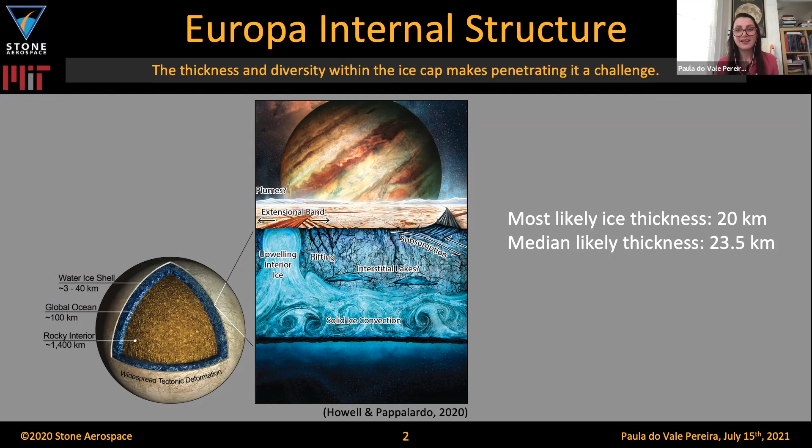Next. There are 4 stages of penetration for the Europan ice, which I'm here calling the starting problem, the cruise phase, the obstacle problem, and the ocean penetration. At the starting problem, there is little contact between the probe and the ice, so it's challenging to transfer much heat. The cruise phase can be divided into the brittle ice transit and the ductile ice transit, and they are characterized by a relatively steady velocity.

We do not know precisely what the composition of the ice in Europa is. We know it's mostly salty water, but there might be blocks of concentrated salt, rocks, cracks, lakes, or even voids on the way of the probe. Passing through such obstacles is very challenging, so we call that interaction the obstacle problem. Lastly, the ocean penetration is the phase in which the probe reaches the ocean.

Next. The stage that is expected to last the longest is the brittle ice transit. So if we develop a model that reliably predicts probe velocity in that stage, we will be able to estimate how much time it will take to reach the ocean.

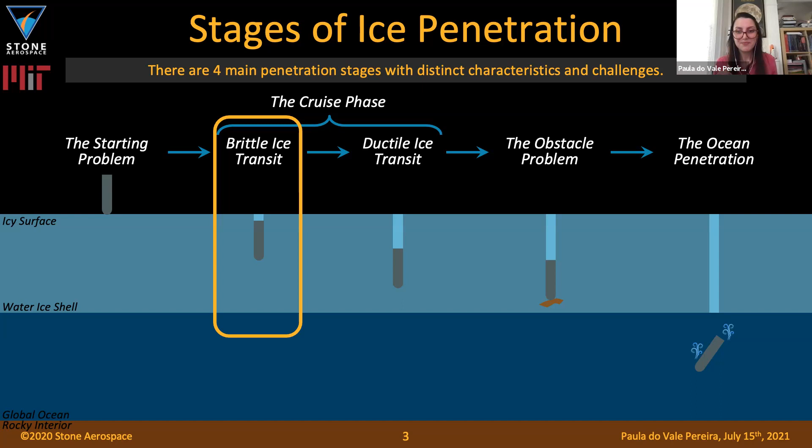Next. There are 4 methods for ice penetration being currently studied: mechanical drilling, hot water drilling, thermal melting, and laser melting. Hot water drilling and laser melting, though, are still in the earlier stages of development, so the most common ones for steady-state ice penetration are currently mechanical drilling and thermal melting.

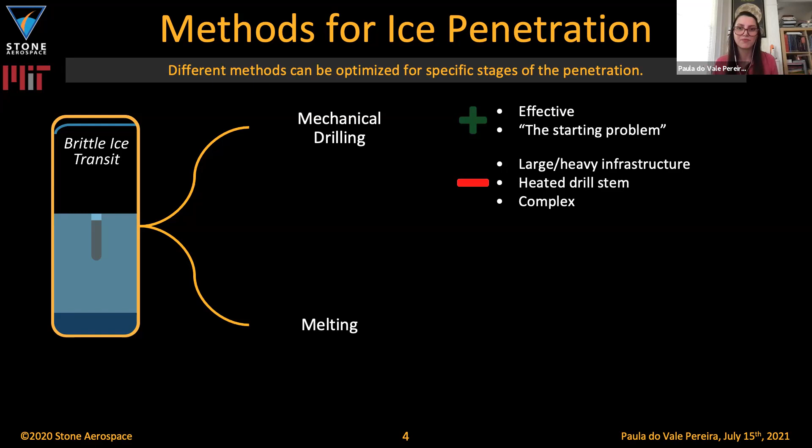While mechanical drilling can be made effective, it is significantly more complex than melting. The large and heavy required infrastructure also needs to be addressed before we can take mechanical drilling to Europa. Melting, on the other hand, is not only the simplest option, but also the one method that can be analytically modeled, making it possible to infer predictions and optimize time to ocean models.

Hence, our focus is on melt probes for the brittle steady state transit. This is important because it will help scientists estimate the amount of time it will take for the probe to reach the ocean and how much power is needed for that speed to be achieved. So talking about models, next.

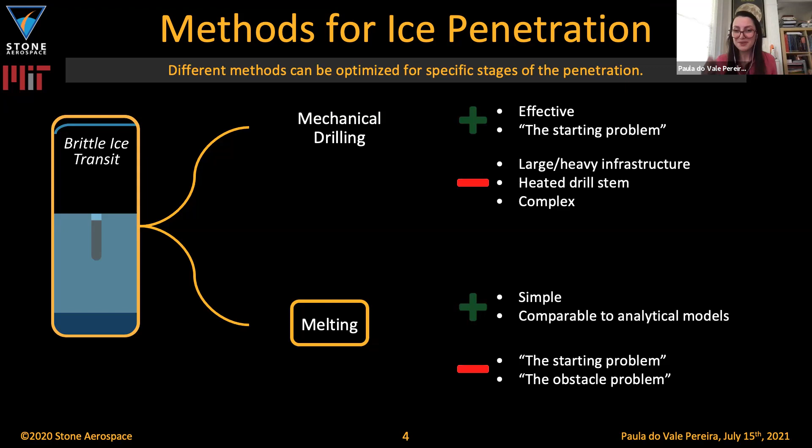There is a seminal model called the Aamot model, which was published back in 1967 and calculates the total heat necessary for a probe to melt and penetrate through the ice. The big takeaways from the model are that to optimize the probe efficiency, we need to maximize descent velocity, minimize the probe diameter, and tune the lateral heat, because insufficient lateral heat would cause the probe to get stuck, while excessive lateral heat would be simply a waste of power.

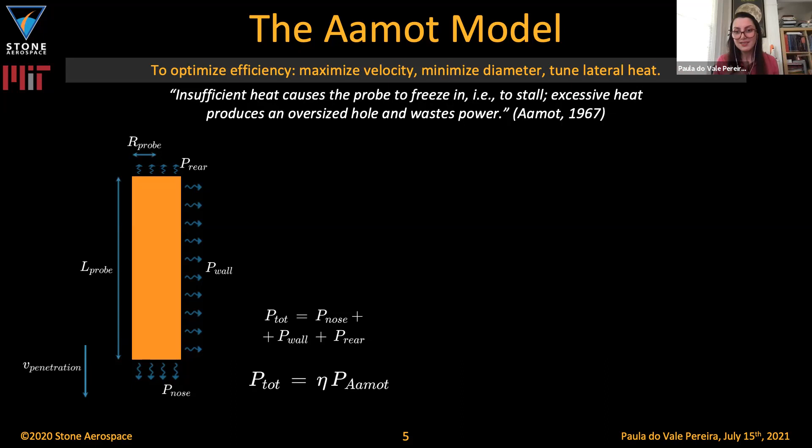This analytical model, though, is full of simplifications and is not experimentally validated yet. So our goal is to tackle that validation gap, which will allow us to calculate the necessary power for a future lander and the number of years it will be needed to operate before it reaches the ocean.

Next, we want to understand what happens on the back of the probe. Like, will the sublimated water vapor redeposit on the walls of the hole and close the hole again? We want to learn how to implement cabling on board the probe, especially if the hole does close back behind it, making it infeasible to store cables on the lander.

We want to know how far off our experimental boundary conditions are from real case Europa. And we want to understand how far off the ideal analytical model is from the actual function of velocity with respect to power. And to do that, we use the Europa Tower.

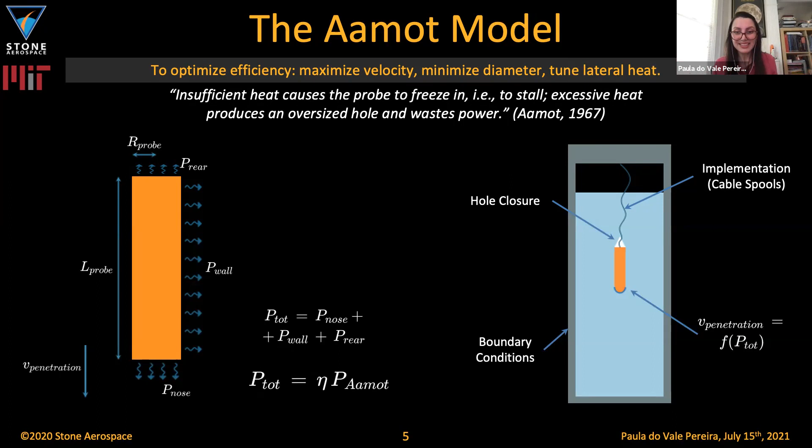Located at Stone Aerospace, the tower's main component is a 3-meter-tall cryogenic vacuum chamber that hosts a column of ice of 2-meter height and 75-centimeter diameter. Very big. The ice is kept at about 100 Kelvin during tests, and the ambient pressure inside the chamber is kept below 10 millitorr.

There are 2 thermocouple strings inside the ice, one at the center that we use to measure the probe's effect onto the ice, and one close to the walls that we use to validate the test boundary conditions. This is the closest to Europa currently available on Earth.

As of now, we have only performed tests in pure water ice, but we plan on testing salty ice in the future. The difference in gravity between Earth and Europa is something we're still thinking about how to tackle, though.

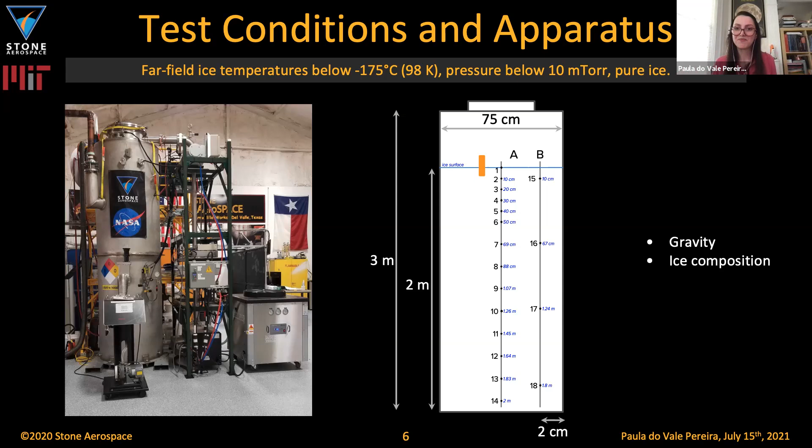The probes we are experimenting with are called the MVPs, or model validation probes. But I have to admit, they are also the most valuable players for my thesis. The probe was designed so that it would be possible to make direct comparisons between the experiments and the model. There are 4 components on the probe.

The first one is the power and thermocouple spool, so we can store the wire on the probe and have it continue to descend even after the hole closes behind it. Next, a spool with an encoder that we use to measure the depth of penetration of the probe. Next, a cartridge heater. And lastly, the actual body of the probe.

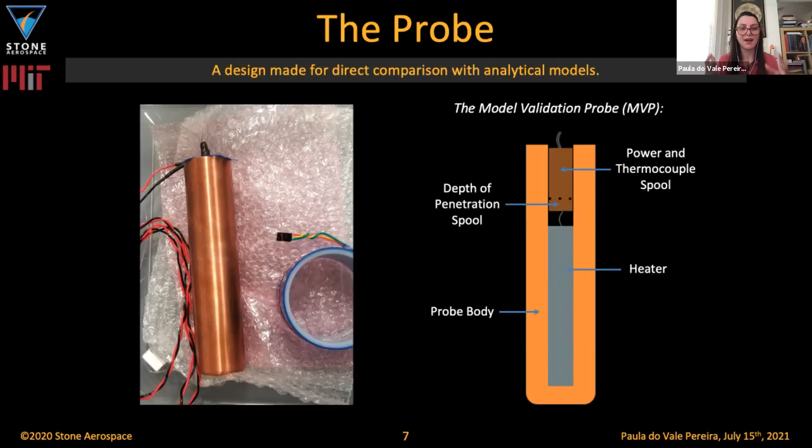We have performed 3 test campaigns so far. We used the first test campaign to learn about implementation challenges ahead of us, and the second and third test campaigns to actually gather the data we need for modeling. The third test campaign was completed just a couple of weeks ago, so we are still analyzing the data. Here I will present an overview of the results from the second test campaign.

We tested 3 copies of the probe at 3 different power levels: 500 watts, 650 watts, and 800 watts. They all present similar trends and learnings, so let's focus on the MVP2 only.

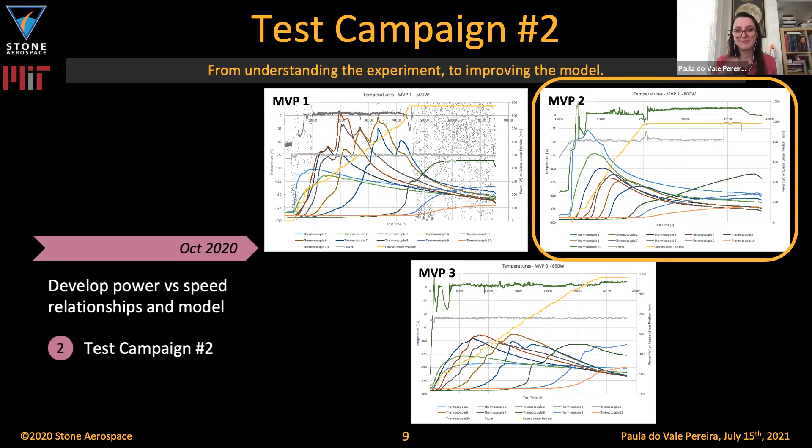Next again. So for MVP2, we had 800 watts input power level. We reached a depth of about 87 centimeters from the point where the back of the probe was flush with the ice surface and had an average velocity of about 44 centimeters an hour.

On the plot, between the power on moment and the stalling moment, you can see the sequential peaks on the temperature measurements. Those are the thermocouples on the central string of the vacuum chamber. And that sequence of peaks shows that the temperature of each thermocouple peaked as the probe passed through it. The first peak is of a shallow thermocouple, and the last peak is of a thermocouple at approximately 90 centimeters

deep into the ice. You can also see that the penetration depth, that yellow growing line, becomes very steady after an initial transient. This transient is the period between the start of the test and the hole closure.

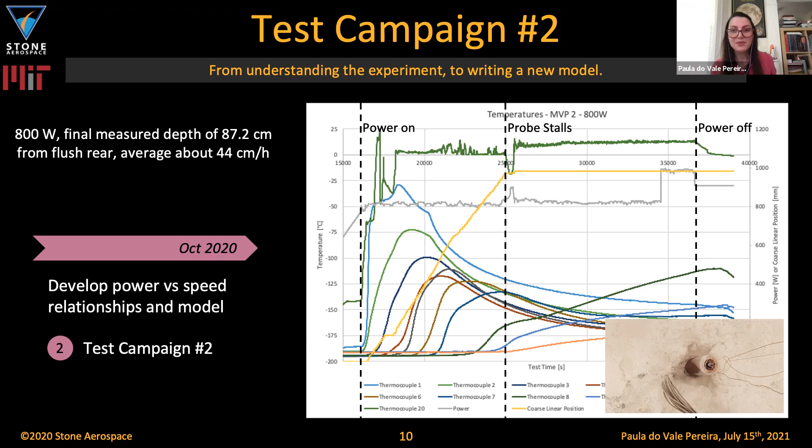So next slide. We use 3 measurements to confirm that the hole behind the probe had indeed closed: pressure, temperature, and position. Could you run the video too? Oh, it's running. Thank you.

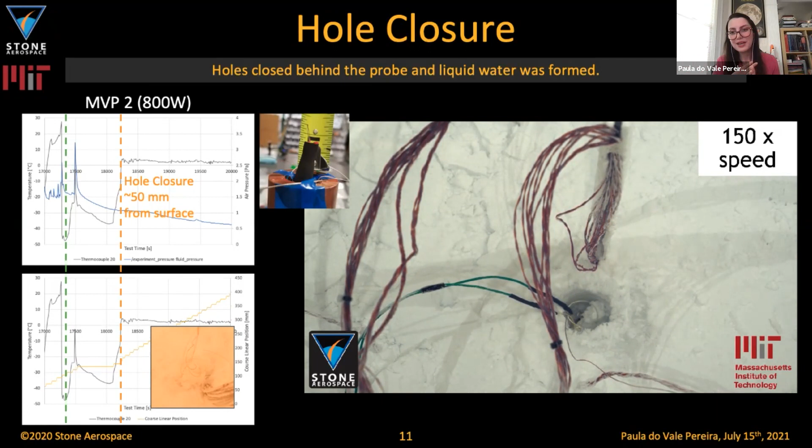After the orange vertical dashed line that you see there, the pressure monotonically decreases, meaning that there is no new dump of water vapor in the chamber. The probe rear temperature is steadily above 0. That thermocouple was located on the trailing edge of the probe at approximately 32 millimeters behind it. The probe descent rate becomes steady, meaning that we are at a relatively steady state condition. With those 3 pieces of information together, we can confirm the hole indeed closed behind the probe.

The depth in which the hole closed is relatively shallow for all the probes, less than 1 probe length. This is important because when the hole closes behind the probe, the pressure starts to increase inside that pocket, raising above the triple point of water and allowing water to reach the liquid phase, which increases the heat transfer efficiency between the probe and the ice and decreases the necessary latent heat transfer. Hence, the closure of the hole increases the probe efficiency significantly.

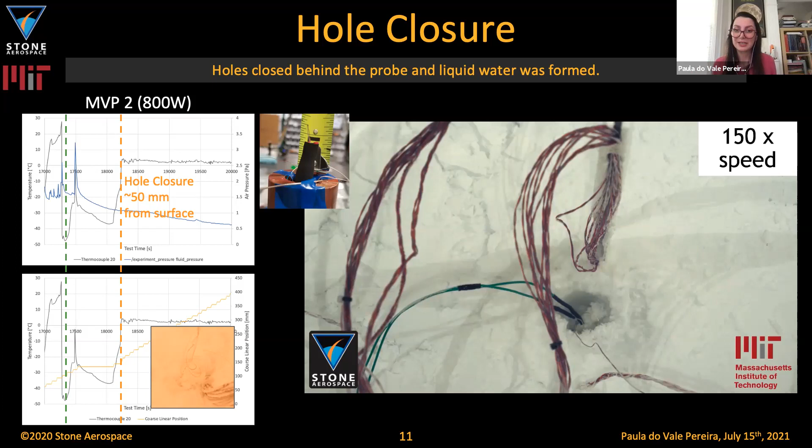Next. With the results of the 3 different power levels, we were able to compare the trends of the experimental data with the Aamot model. The trends are very similar, but with a shift towards lower efficiency. We are currently working together with NASA JPL to refine the thermal models to close that gap.

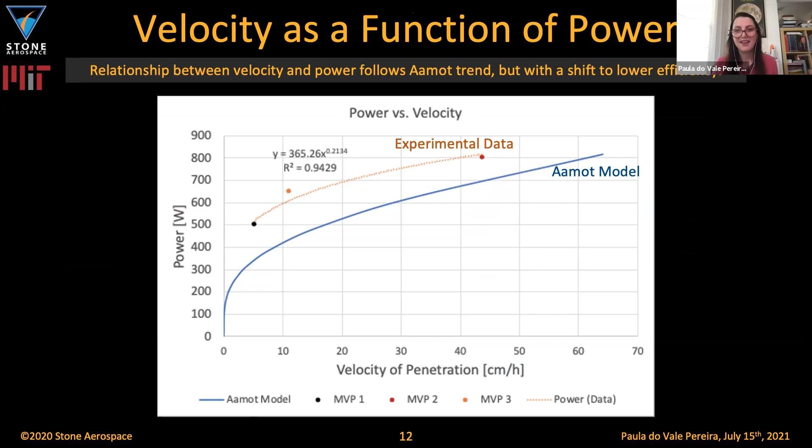Next. On the first attempt to validate the model, we can notice 2 trends. The first one is that at higher velocities, the probes are more efficient. This happens because at higher velocities, the heat that is lost through lateral dissipation is relatively smaller. Next, the second trend is that we are closer to Aamot predictions at higher speeds. This happens because at lower speeds, the idealities of the Aamot model are too far from reality. But at higher speeds, the model becomes closer to the ideal condition.

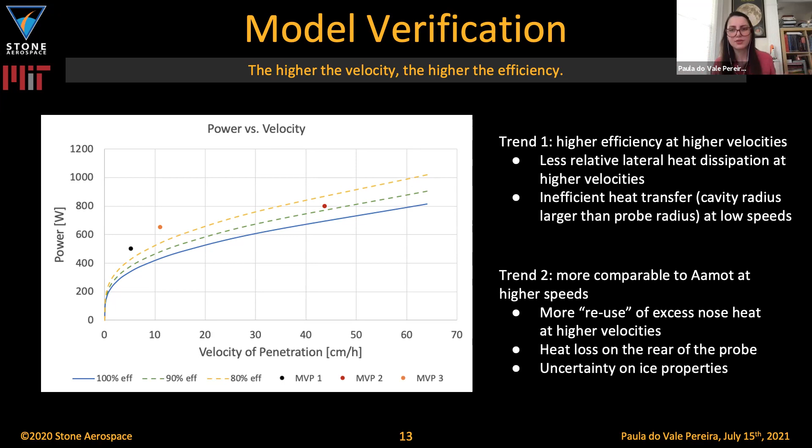Next. I would like to conclude this presentation saying that our first set of experimental results confirmed that the hole indeed closes behind the probes, confirmed that the higher velocities happen at higher efficiencies, predicted the descent rates lower than the Aamot model as expected, presented well-behaved boundary conditions, and had successful measurements of penetration depth.

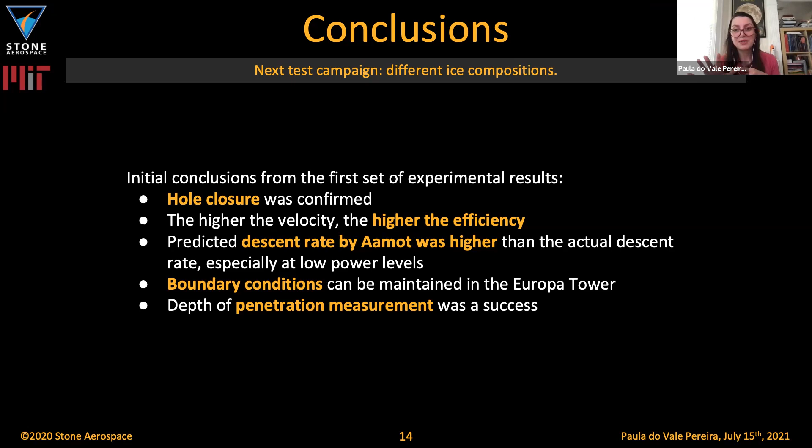Next. Our next steps are going to be to test our probes at different ice compositions, test probes with different instrumentations, and test probes that use hot water jetting to aid the descent.